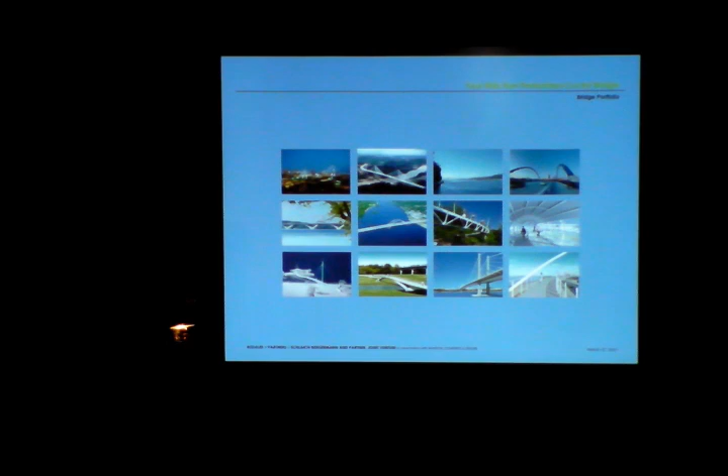We're very excited to come here to make the presentation, and every time there is a competition in the US, we always try to enter it because there are so few, and we wish there were more, because it really makes the process of creativity much more intense, and we feel like it's a very good way to find a very good solution for a crossing like this.

We have a lot of experience in large-scale bridges, but we tend also to focus on pedestrian bridges. There is a fundamental difference between a pedestrian bridge and a large highway bridge. I think it has to do with the scale and the detailing and the fact that you can touch it and you can walk on it. So it's really sort of a different scale.

And although we have a lot of projects in the joint venture, not only here in the US, but all over the world and in Europe, we try to focus in the presentation mainly on projects in the US, because I think they have a particular challenge. As you know, it's not very easy to do a beautiful, unique bridge in the US, unfortunately. It's quite hard. So we're going to show you some examples of what we have done, and then finish with the concept.

And actually, I was walking today in Alexandria, and we were part of the Woodrow Wilson Bridge competition. That was almost 10 years ago. We were part of the team that won that. And it's nice to see the bridge finished and people enjoying that area.

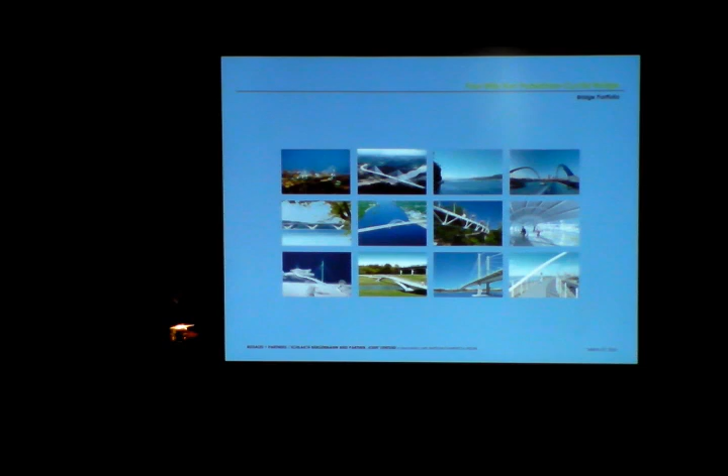We want to start first with the Liberty Bridge. This bridge is 5 years old, and it's in Greenville, South Carolina. This area used to be very different. There used to be a highway bridge here that was 6 lanes wide, and they had a column right over the falls. So the people actually forgot that there was a fall in the city. Nobody could see it. It was a big cover over the waterfall.

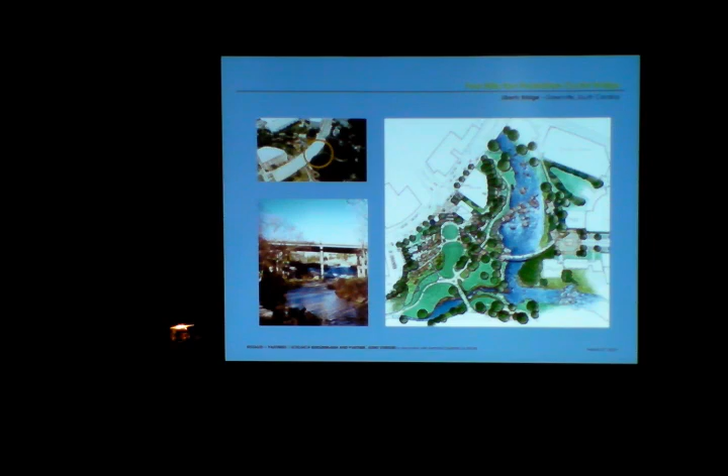A new mayor came into power, and he decided to demolish the highway and do a new bridge. But this bridge used to be in this alignment, right over the water. We decided the first gesture would be to move it away, because we wanted not to have any supports in the water and have a very good view of the waterfall. Just by doing that, it really opened a lot of possibilities. We feel like the alignment of the bridge is very important because it will really determine what kind of structure you can work with and what kind of issues you can address.

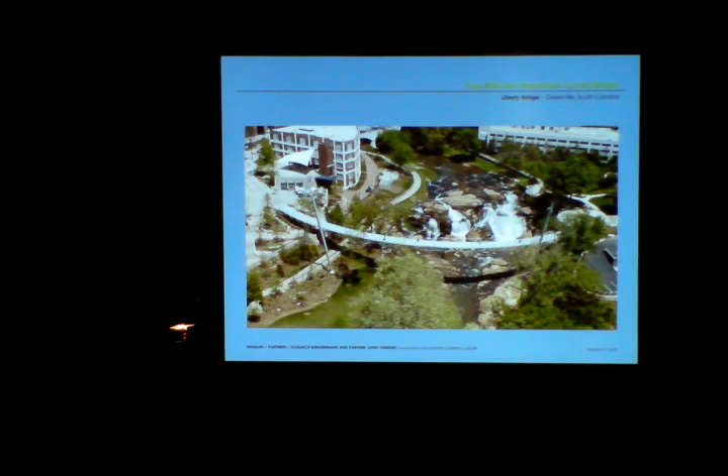This view of the bridge: it's a 380 feet long bridge, 12 feet wide, and it has 2 towers. It's an extremely transparent bridge, and it's been very successful. It won all the awards in the United States. And we feel like it fits very well with the site, because once you are here and you see the waterfall and you experience the nature, it is really unforgettable, especially at night. It became the most romantic kind of walk in the city, and I'm always amazed how people enjoy it.

Some of the issues that were important to resolve was what kind of structure this will be. And because it's a circular bridge, we were able to support only from one side. And this is the first bridge in the United States that has a suspension cable only on one location. And that allows you to have a clean view of the waterfall.

We also spent a lot of time in the detailing and making it as transparent and as clean as possible. And that's something that is very important. If the concept cannot be translated into a good detailing, especially in the pedestrian bridge, you really lose a lot. It's quite important to have all the details very well resolved.

I have to report that the bridge, since it has been built, has had a lot of development. There's about $200 million of buildings that are now close to the bridge, and the whole downtown was kind of revitalized when the bridge was completed, and also the park. And both elements were very important for making Greenville more accessible to that zone of the area. Because before, the downtown used to stop like 2 or 3 blocks before the bridge, and now the whole downtown has been extended, so it's quite successful.

These are some other views. It's very dramatic from underneath. I think the lighting came out really nice. It almost feels like water when you are walking on it. And we leave the lights on all the time. They are LED lighting, and when the night starts to come, the bridge starts to glow, and it starts to become stronger and stronger, and it's quite dramatic. And they are hidden here, and they are quite unobstructed. You really don't understand where the light is coming from.

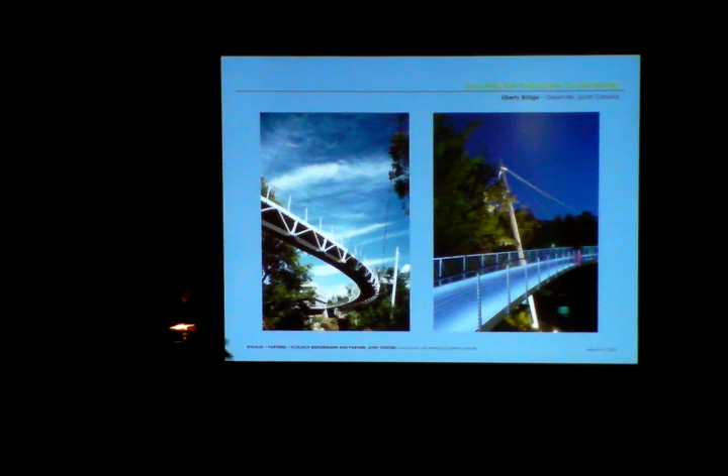I'm going to show another bridge. This one is in Fort Worth. It's called the Lancaster Bridge. Actually, the city is going to name it after the person that used to clean the river. This is the Trinity River. And this area is very close to this bridge called Lancaster. And this is an important bridge to them. It's a sort of a historic bridge. And the city wanted to connect this park to the downtown. So the bridge needs to cross in this location. It's a very kind of pastoral, very kind of quiet setting.

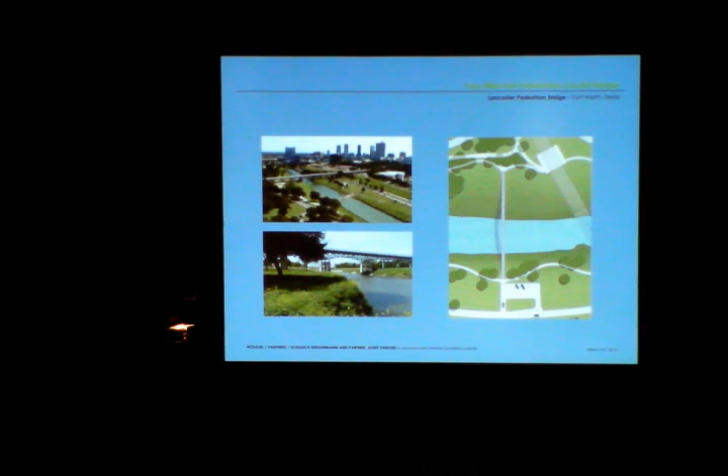And we felt like in this crossing we should have a structure that was not too showy, that was not too iconic, because we felt like the landscape was very simple. And in this case, they really didn't have a lot of funding, so the closest we could do is a straight line. Every time you make a straight line on the bridge, it's always cheaper. If you make it circular, it's always more expensive. And the funds here were very limited.

It's about $2.5 million. It's an interesting bridge because it's a combination of an arch and a stress ribbon. And usually you don't have this combination. You either have an arch or you have a stress ribbon. But in this case, we felt that it would be nice to have this kind of undulating shape where you walk in and you would not know what's happening on the other side. Kind of like a Japanese type of structure when you go up and down.

And it's lucky that this system was also working very well structurally, because this force wants to come this way, and this wants to come this way, so they kind of neutralize each other, so it makes the foundation quite inexpensive. And that was an important consideration because of the lack of funds.

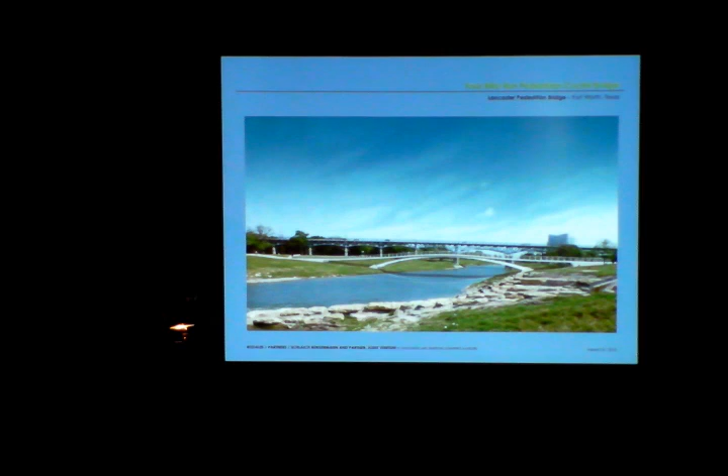One thing that was interesting is the local community. There is a company called Streams and Valleys. They take care of the bridge. They have fundraised to make this bridge possible. And if there is a good design, it's something that you can always entertain, try to get some private funding. And both in the Liberty Bridge and in this case, we were successful to do that. This is another view when you are going up and down the structure. It's kind of like a hammock.

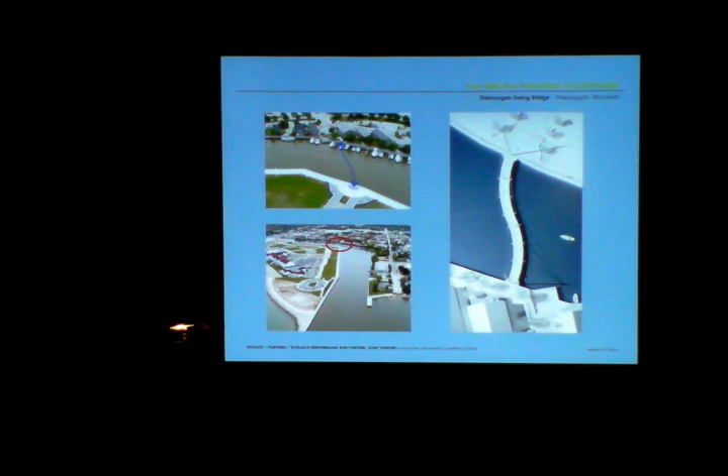We also feel like when we do a pedestrian bridge, it's very important to do a model. And I would recommend you, if you're going to go ahead with this structure here in the Four Mile Run, that you should do a model. It's never quite the same to have a rendering and a model, because the bridge is always very sculptural, and you can really not understand the scale unless you have this model.

And actually this model is quite interesting because actually it opens. So it's very exciting for people to see the bridge, how the bridge is working, with the motor and everything like that.

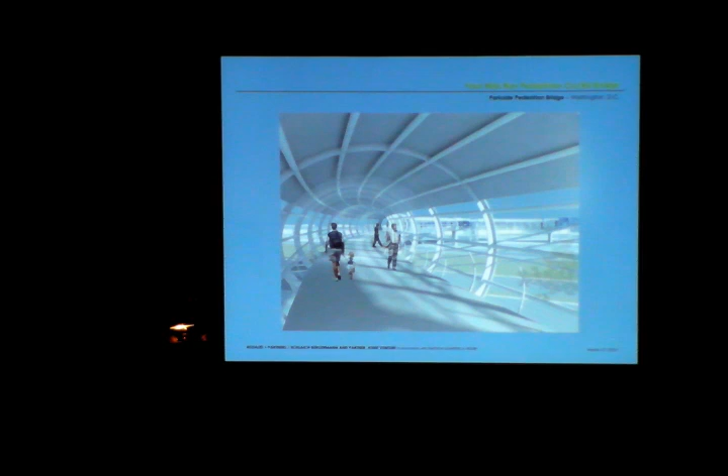The last project I'm going to show you, this one is another competition that we won about 2 years ago. It's for a crossing near Washington, D.C. that connects to a train station. And it's near Parkside, one of the developments in this train station.

And this was a hard project because you have a lot of highways. It's about 10 lanes wide that you have to cross, and it's I-295, so it cannot really be interrupted. You have to have it continuous all the time. And then there is the trains. There is a train station, and there are two types of trains: the commuter train, and then the other train, more of the regional train.

And the competition brief wanted us to have a straight bridge going across here, but we felt like it was important to make a connection directly to the train station. That is this connection here. And that's why we curved the bridge. And we're never afraid to change the alignment of a bridge if it's going to serve an important purpose. I think that's an important consideration.

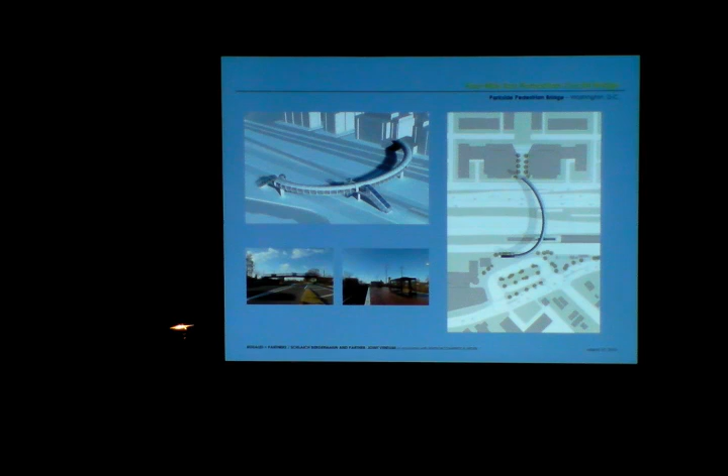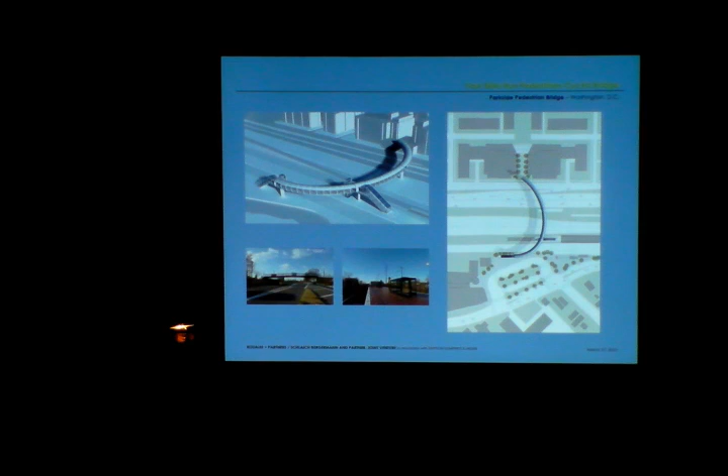And in this case, they wanted to have a covered bridge. And we decided to do this cylindrical structure that has these modules that you can build off-site, and then you can bring this entire piece and put it over the highway at one point, and that saves you a lot of time, and then you don't have to have any scaffolding underneath.

And one of the problems with covered bridges is that many times the structure of the cover does not relate to the structure underneath. So it looks very inconsistent. Here, the structure itself is the cover. So it's very, very compatible. And because it's quite a big span, it's about 600 feet long, we wanted to keep these rings quite thin, so there would be a lot of transparency.

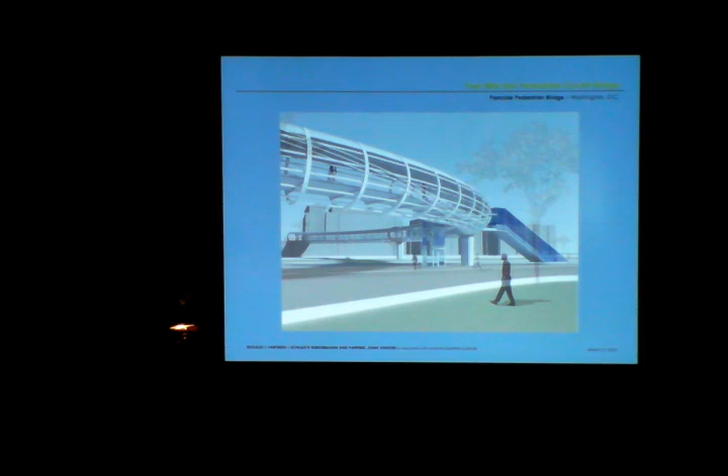We also have these cables, these suspension cables that connect to each of the supports, and they help to transmit the loads to the ends of the supports, and also add a lot of interest to the structure, because they follow kind of similar curves, but in the other direction.

And you can see here the direct connection from the train station to the bridge. And I feel in this case, because you are going to stay above, it will give you a very good sense of safety to come into the train station. Right now, people have to go under the trains and then come here, and there is a ramp here that goes to a pedestrian bridge. It's very difficult.

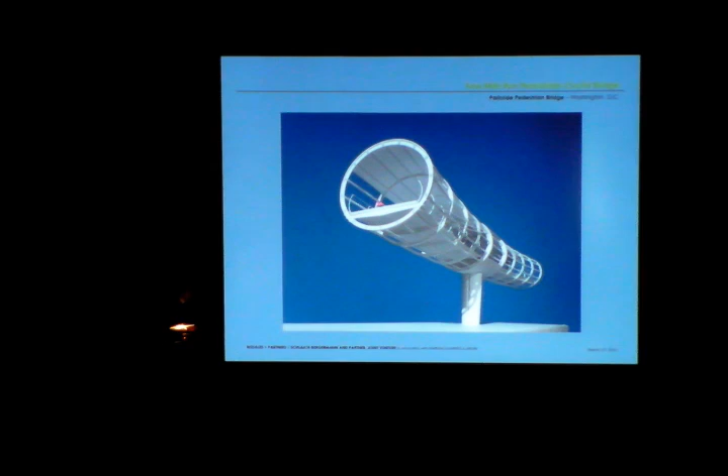So we always feel like the pedestrians will take priority, and we always try to put them above if we can. And in some of the highway bridges we have done, we also try to put the pedestrians at a different level, because you feel much safer on that side. This is a photo of the model. Again, it was very important to see the scale of the elements and all of the detailing, how the structure would work.

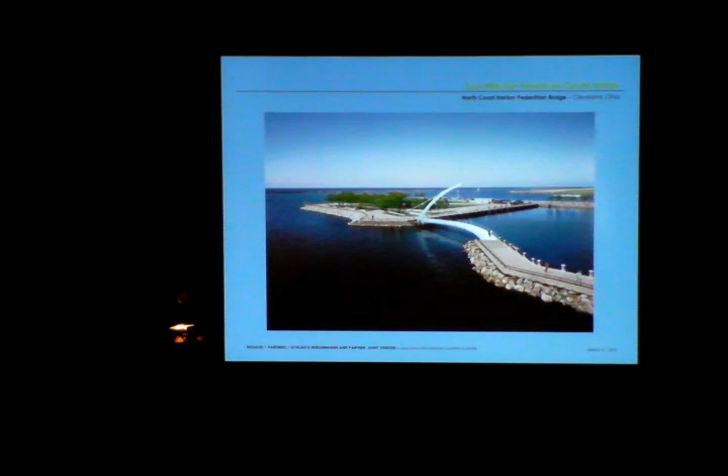And one of the last projects I'm going to show you is this one in Cleveland. It's a movable bridge too, and it's in a very important location. And it opens like that. It's completely different. Instead of swing, this is a bascule. But the bascule is quite interesting because there is no counterweight in the back. It's mainly operated hydraulically and with the cable.

Many of these bascule bridges have very heavy counterweights in the back, and it makes them quite unattractive. In this case, because it's a pedestrian bridge, we were able to do that, and Schlaich Bergermann was very instrumental in resolving how to open it and close it.

One thing I like about this bridge is that when it's open, it's very sculptural, and it's in a very important location. It's right at the entrance of Lake Erie, and next to it is the I.M. Pei Rock and Roll Museum, and every time there is a postcard taken of Cleveland, they always take it from there, from the lake. This bridge is going to be right here, and for many years, you were not able to cross. They had a finger pier, but they were never able to get a resolution here.

And again, we encountered this problem here that we wanted to make a smooth transition, and we made this very shallow curve to do that. If we made it straight, it always looked very awkward because this area here is used for boats. So again, we try to shape the bridge in a way that will fit well with the context and also give us another possibility. And once you make it curve, it was possible to only support it from one side

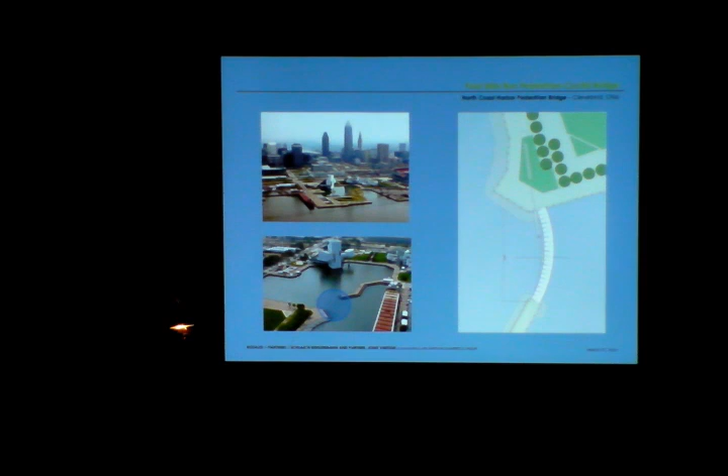with a single structure. And in this case, we also felt like, to have a kind of counterweight to the famous museum, we should concentrate the structure only on this side and very lightly touch the finger pier on the other side. And that's why it has that shape. And this is another view, when the bridge is open.

And it's quite funny because when people look at structures, they always make associations: what does it look like? And I think a lot of people think this looks like a wing, and then this part here is called Voinovich. Some people think it looks like a V. So you never know what people are going to take from a structure, but we are very pleased with the structure and how it is coming about.

This is at night. Again, I think the possibilities are endless in terms of lighting, and this is quite a dark area, so we feel like the walking surface should be illuminated, and you should illuminate the steel arch also.

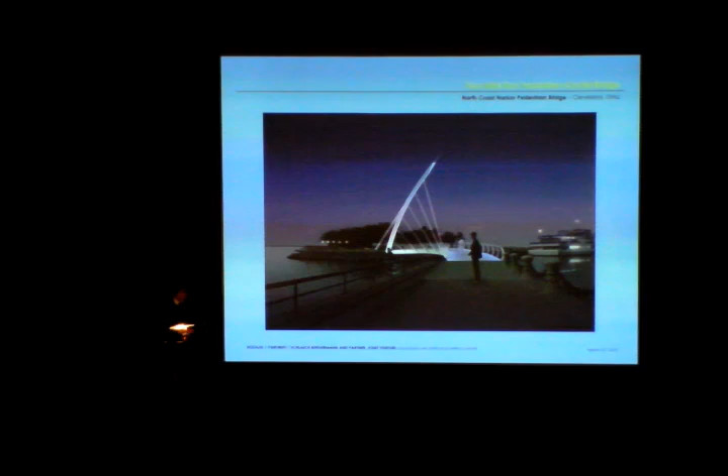And now we come to your project. I think that this is a very difficult site, mainly because you have all of these electrical wires and the towers and all of the conditions that are happening there. And when we first came to see it, it looked quite grim, so I was kind of concerned how we're going to find a structure that will fit in that location. But I think once you do the restoration, you have more greenery and the trees, and you restore the area, it's going to be much more pleasant.

And right after the site, it's much nicer. When you get to the inlet and then you have more of the reserve part with more trees, I think it's going to look quite nice. Another thing that surprised me is that at night it's quite dark. There are not a lot of lights in that immediate location. So I think illuminating the bridge could make a big difference.

And it's very important in this site that you are able to see the bridge from the highway, from Route 1 or the street that is adjacent, because that's going to attract a lot of people. If you are not able to see the bridge from a distance, it's going to be hard to make that a special place, because right now it's a little bit desolate where it's located.

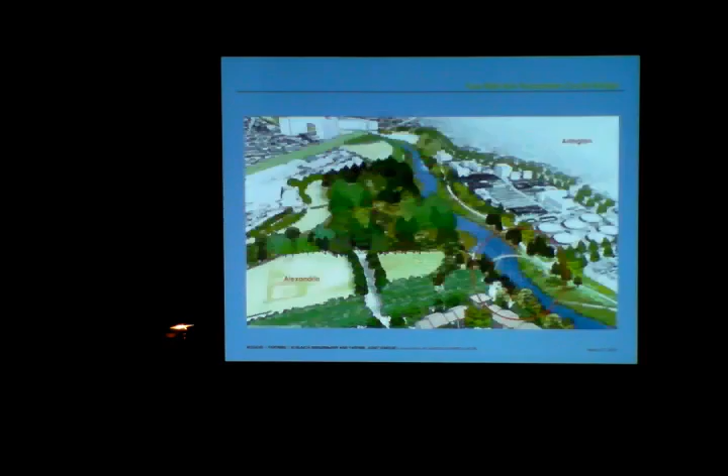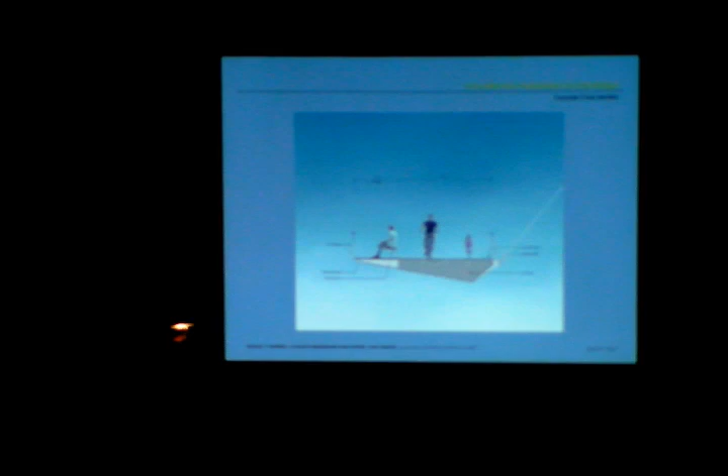Can we go back? For some reason, I cannot show you the plan. Can somebody move it back? The next slide. It doesn't work. Here, thank you. Thank you very much.

Well, this is the plan. And as I was telling you, what I felt was very difficult was all these electric wires and all those towers. So originally, the bridge was supposed to come here, to connect Commonwealth Avenue and Eads Street. But I really felt like we should not have the bridge under the electrical wires. Maybe in the future they are going to be replaced, but the competition brief didn't say they were going to be replaced. So we felt that it was important to move it away.

And we curved it in this way so it will be obvious for people to come here to cross it and go into their location. And once we did that, we felt like it would be nice to make this more of a space, a kind of space where people come and you could have a demonstration project, kind of like a small piece of how the future is going to be for the whole canal.

So we feel like there could be a little area here at the end of this street where you could have information about the whole project, and you could actually also have information about the bridge structure. A lot of people like to know how such a bridge would be constructed. Then we put one support here, and then a clear span of about 360 feet. To me, it's very important not to have any supports in the water, because it will be much cleaner, and then the vegetation will go underneath.

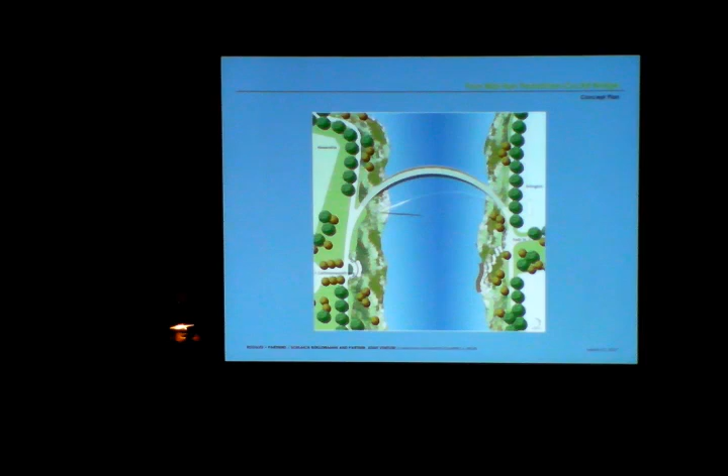It's a simple structure. It's a suspension bridge, and it has a single tower. It's about 120 feet high, and in this direction about 230, because it curves a little bit longer. And we feel like having the tower inclined actually is a positive, because it takes away from the straight towers that you have all over the place. So having it in that direction is gently going towards the water, and it will be a very transparent structure, and we think it's not too dominant in terms of the context.

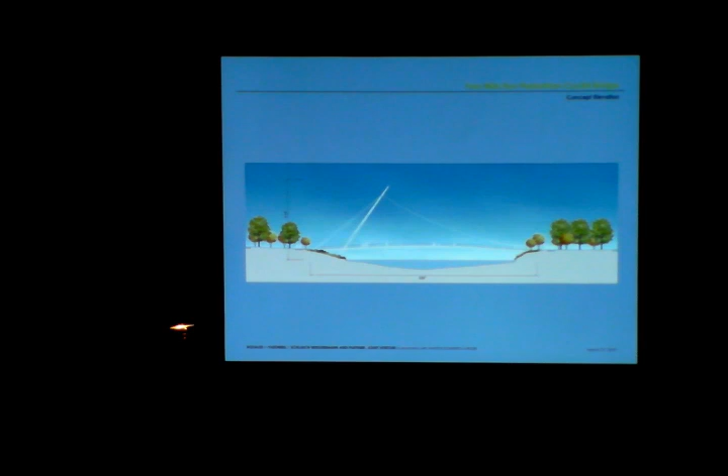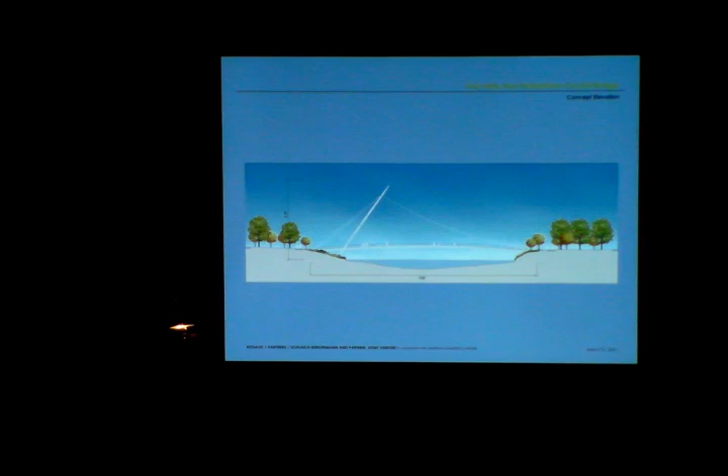We didn't see the other one either. Yeah, this one here. Thank you.

This is a cross section where you can see the scale. This is a 12 feet wide bridge, but we have this other element where you can sit. This is about 6 feet, but altogether at the center it will be 18 feet, and then it diminishes in a curve. And we feel like it would be nice to have an area where bicyclists can cross, so it's like a zone of higher speed. And then next to the other side where you can see all the vegetation, there will be a little zone where people can sit and stop and look out. And we would like to change the material there.

And you can see here some of the detailing of all of the elements. It's very light, it's a simple structure. Not very easy to engineer though. It's going to be complicated, because again it's curved, and it has cables only in one direction. So only a very talented engineer can figure that out.

And here you can see the cross section is a steel box here, and this area will be open with beams, and we'll change the material. So you will have 12 feet here, and this is the variable cross section. We make the railings quite transparent, and we introduce wood in the railings. I think because you want to make this place more natural, and you have to bring on the restoration of the plants, having wood in the bridge is very nice.

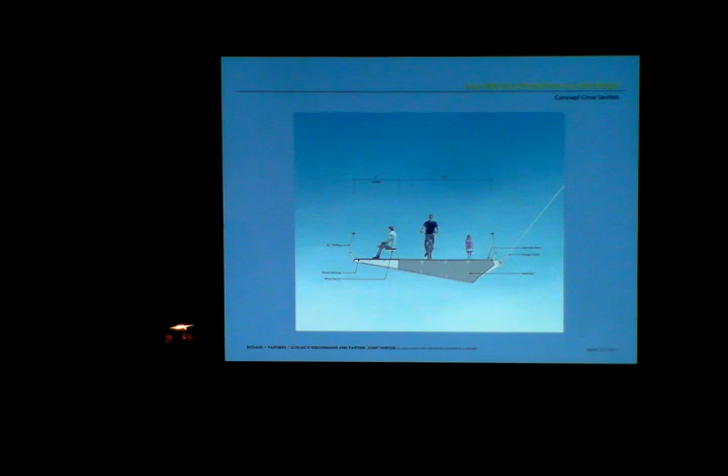And if you have been on some bridges in Paris, they use a lot of wood, and sometimes it's a little bit slippery, but we're making the main crossing in concrete. So this area is really just for people to sit and look out. This is another view where you can see the structure. We can see the little plaza that we wanted to put here.

Then when we were on the site, we saw there's a lot of people fishing. And I wondered how good the fish are, but there were a lot of people fishing. So it would be nice to have a way to come down, and then maybe have a little deck here where people could fish. And then we feel like this whole area becomes like a little place, a little space where you can fish, you can learn about the project, you can cross and look at the bridge. So it starts to work like a unit.

And that's really important to have something like that at the beginning of such a big project, so people get enthusiastic, and you start to feel like it's possible to do the whole restoration of the whole structure.

And now I would like to introduce Michael Stein from Schlaich Bergermann. He's going to explain to you a little bit about the structural considerations. In a bridge of this scale and this configuration, the structure and the architecture cannot be separated. It's really a unit, and we work very closely to make a structure as elegant as possible, but also feasible. Because you don't want to do a proposal, a concept, and afterwards it's not feasible. So he's going to explain a little bit about some of the structural considerations.

Thank you, Miguel. And I'm also very excited to be here. I was thinking about you, and I thought you might not be so excited that I am talking now, as I'm just a structural engineer, and you expect a lot of numbers now. I will spare you that. I will not talk a lot about numbers.

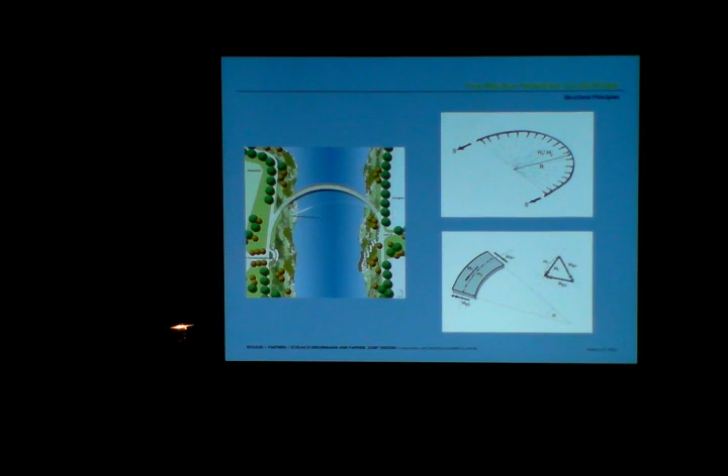Now I start here. Go back here. Here it is. It's just slow.

And we want to hang it just from one side. A straight bridge, everybody can imagine, would simply flip over and fall down. So how to do it is to use the curvature and say, well, it wants to flip down, but due to the fact that it's curved, you can resolve that torsional moment into a main bending moment. This is the whole trick, and you need to design it like that to achieve, at the end of the day, a section like that, which is just 2.5 feet or so high. It's very slender for a span like that, and it avoids the big torsional boxes you might expect.

Also, the suspension bridge itself is, of course, the lightest way to support a structure like that. You see it in each highway bridge: as soon as you reach a certain span, you come to the cable-supported bridge, be it a cable-stayed or a suspension bridge. It's always the cable which, at the end of the day, proves to be the most efficient structure. So it's a combination of the suspension plus the curve which makes it possible to suspend a bridge like that.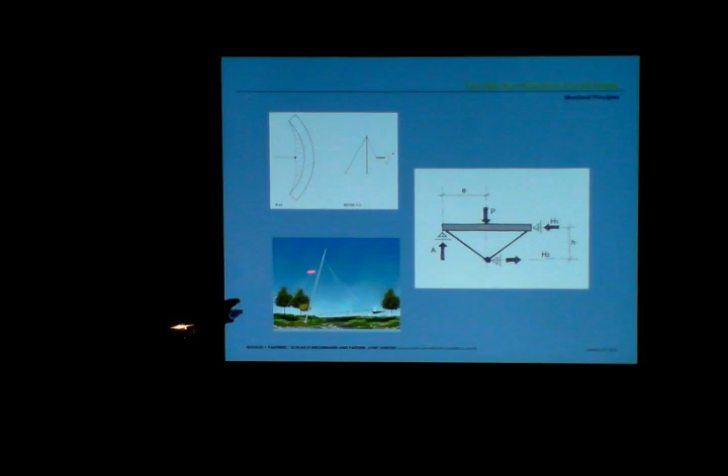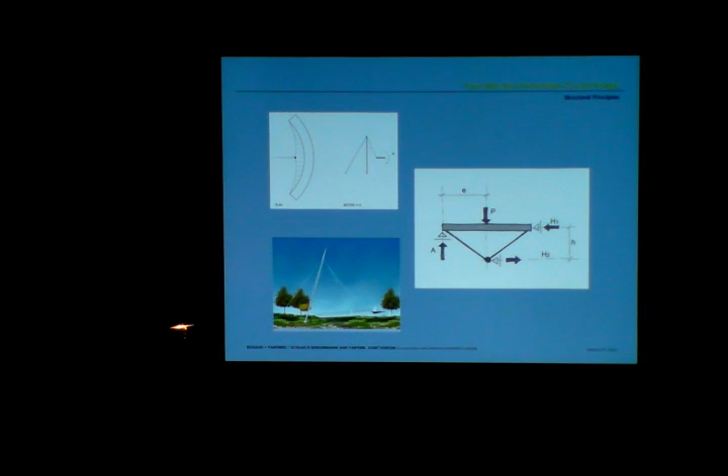Another important principle for our work is that it needs to be calculated in 3D, and we started that process to provide you, the audience, not only with an idea of how it could look, but really show how the shape of the cables and the inclination of the mast, etc., would really look. So we created this 3D model, which of course looks much more boring than the renderings, as you expected. You see the mast, the backstay cable, and the curve, plus you already see the zone for pedestrians where they want to rest.

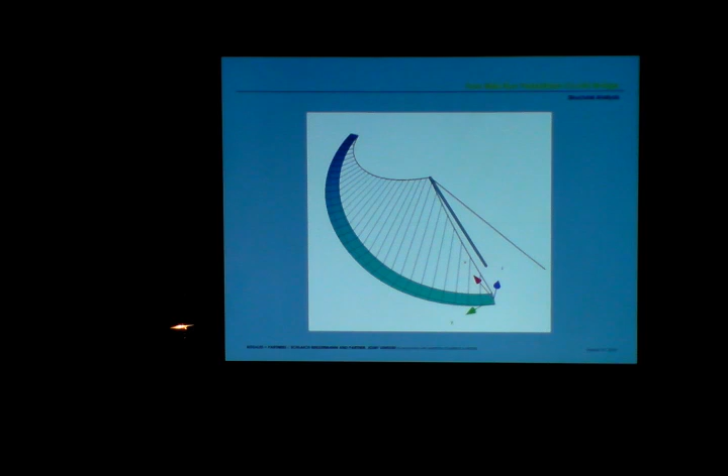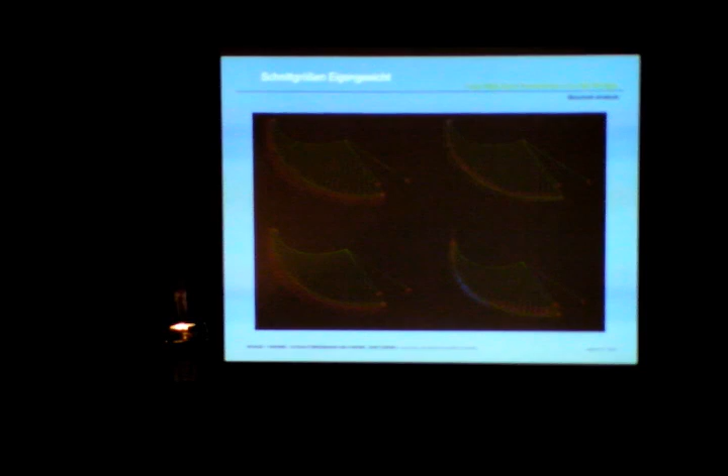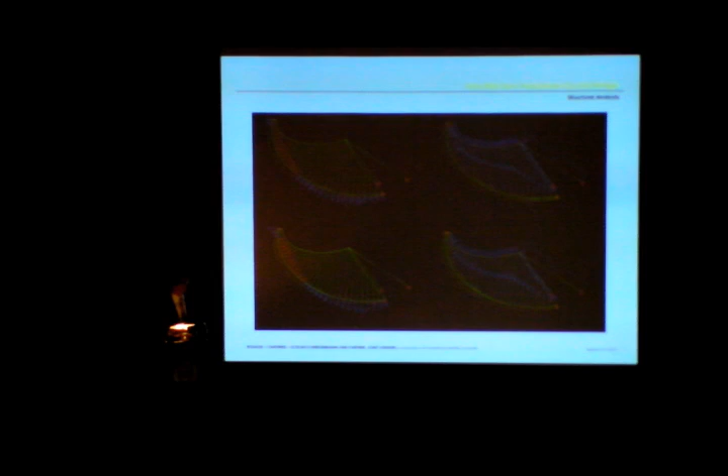We made a very initial calculation to show that this bridge behaves like it's expected, and to show that the moments and normal forces and all these numbers are in a range which make this bridge an economic and a competitive alternative to cross that river. I think this is more or less what I want to show, and I give it back to Miguel.

When we were thinking about the project, we felt like there are supposed to be other bridges also across the run, and we feel like you can form like a family of bridges, and using the same curve system, you can do many different applications. You could have towers on this location. For example, this one has an arch that could look like that.

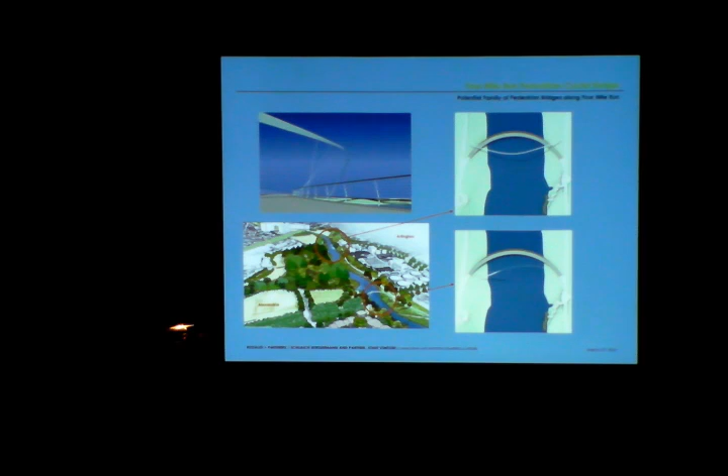But we feel like each of these will continue to have a very good tradition and excellence of design and of detailing. And this bridge is going to be very important because it's going to be the first. So every time that you do the first step, you're really going to set the scene for the whole system, I think, future bridges. So we really need to make the best possible solution here. And that was one of the thoughts that we had.

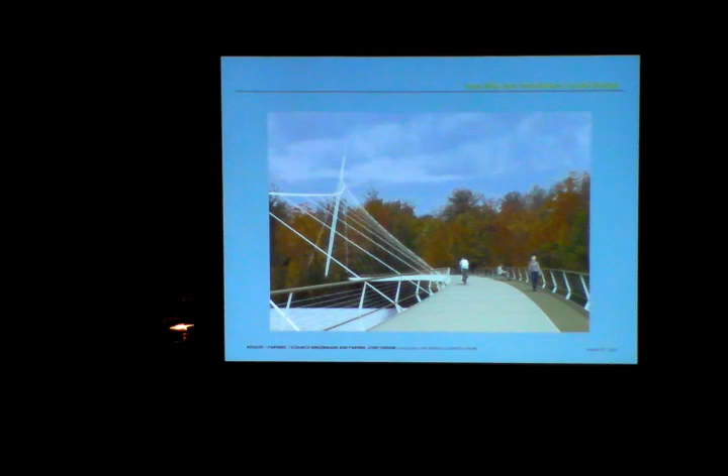And this, to me, creates a very nice screen against the wires and everything that you see on that side. And then you can really focus a little bit on the landscape on the other location. So it's both asymmetrical in terms of the whole crossing, but also asymmetrical in terms of the section. And I think that responds well to the site.

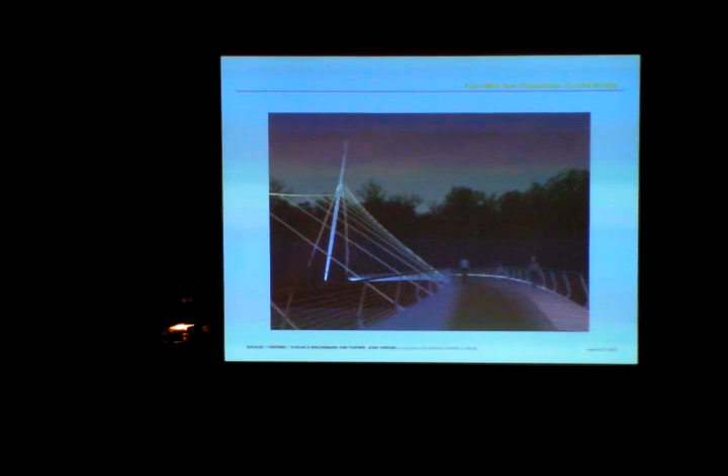And at night, this area could be treated slightly differently. We were thinking it might be possible that we put light underneath that will go through the wood. And then you could have this also illuminated with a certain muted color. We feel like it should not be too overwhelming, it should be quite light. And we have found that the blues and purples that the LED lights have now can be quite attractive.

And then when you see it from underneath, you could make a very strong statement of the circle by illuminating this area. Again, this light will go through, and people will be able to see some of it when you are standing here. And it creates kind of a strong dynamic, with one light underneath and on top. In a structure like this where there's nothing around it, we feel like doing this ribbon of illumination is quite important because people will feel attracted to it. You'll see it from a distance and it will be quite interesting to come and see it.

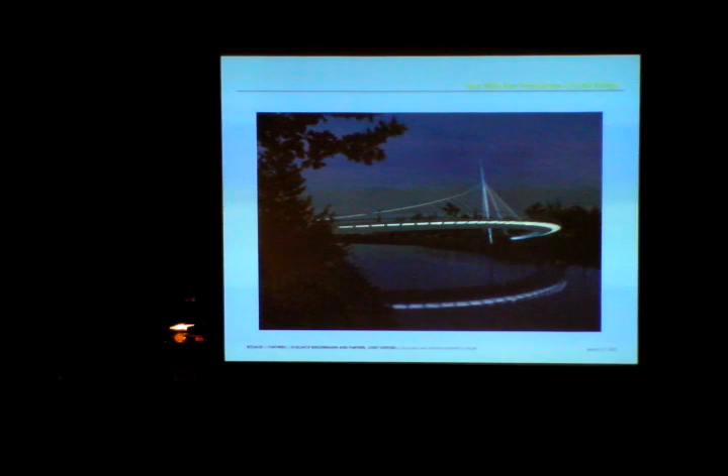And this is another view during the night, and now we would like to open it to questions and answers. Thank you very much.

I'm a little bit confused, and perhaps you can help me out. You have three team members, is that right? Yes. Your firm, Schlaich, and you presented a number of projects to us: Woodrow Wilson, Liberty Bridge, Oregon, a pedestrian bridge in Washington, D.C., a couple of others. Was that done by the team, or different bridges by different team members, or what was the relationship of your team to those projects?

All of the pedestrian bridges were done together with Bergermann. All of the ones that we show in the presentation. I have been working with Paul on a bridge in Boston, so we have an old relationship. We worked on the Longfellow Bridge in Boston. But the main reason they were brought in is because we need to have a local engineer. So they have a Virginia license and they have an office here. And we usually do that. We cannot have a license in every state. So we will do a joint venture with Schlaich Bergermann, and we will do the concept.